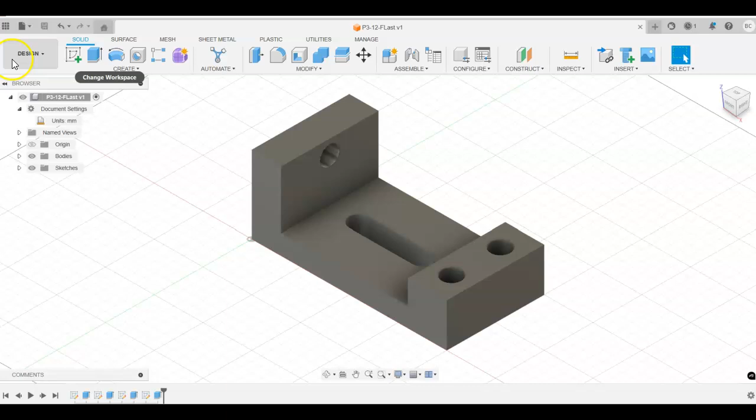All right, so we now have completed the model of P3-12 and the text. So we're going to create the working drawing of this. So let's go over to design, drawing from the design. Notice because we were in and are doing this drawing in millimeters, it auto defaults and automatically comes up as the ISO standard and a sheet size of A3.

This is corresponding to the International Standards Organization as opposed to the American Society of Mechanical Engineers. So we're going to go to the ASME standard. We want to be working in the ASME standard, and this has given us a sheet size of B. So kind of try to relate the size of the part to the actual size that it would be on paper. Remember, our paper size for a B drawing is 11 by 17. So is this going to fit?

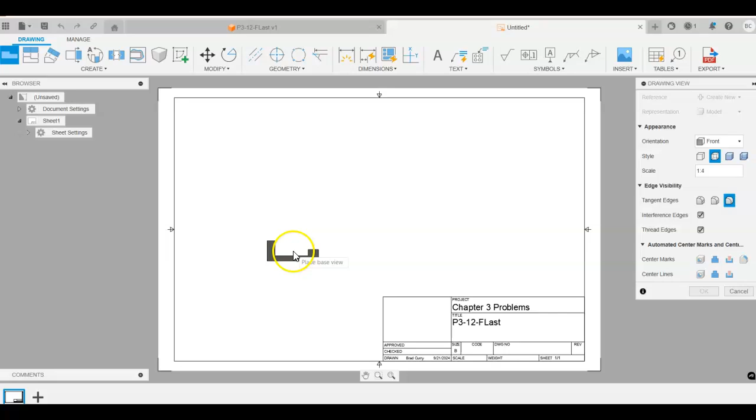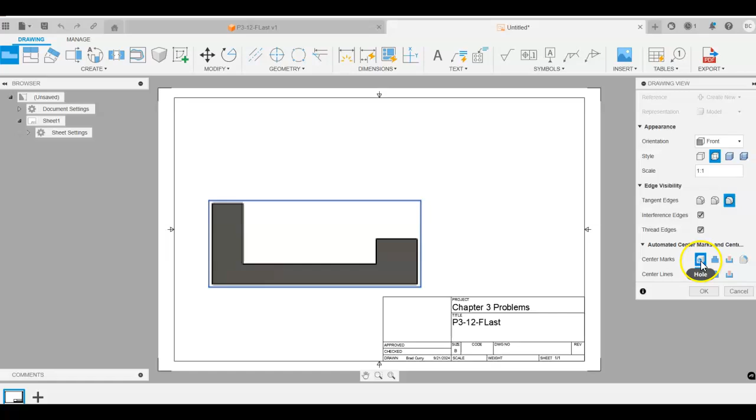So let's go ahead and click OK just so we can see what happens here. Now notice, this is bringing this in at a quarter scale. So if I wanted to at this point, we could make this 1-to-1 scale. And as you can see, at a 1-to-1 drawing, I can get this taken care of. Let's check mark and activate these center marks and holes. See if that makes any difference. Click OK.

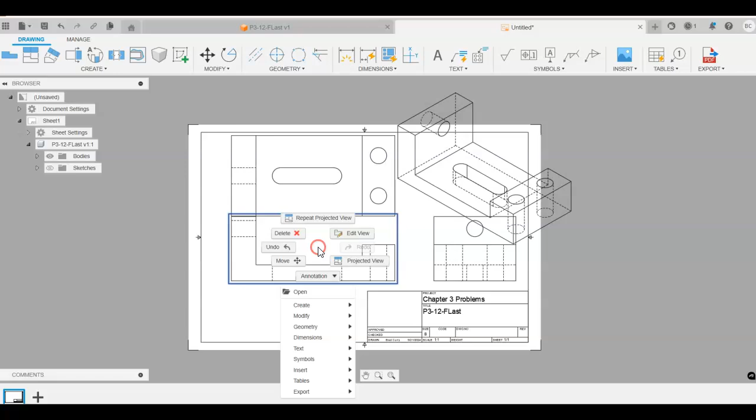Now let's do our projected view. So I'm going to project over. Now notice we still don't have enough room here for all these views. So it's still too large. So let's go back and edit this view. Let's make this a half scale instead. It changes everything there and brings that into half scale. Right up here, let's edit this view. I'm going to make this a quarter scale because I don't need it to be that big. And we'll close that out. So that gives us the size.

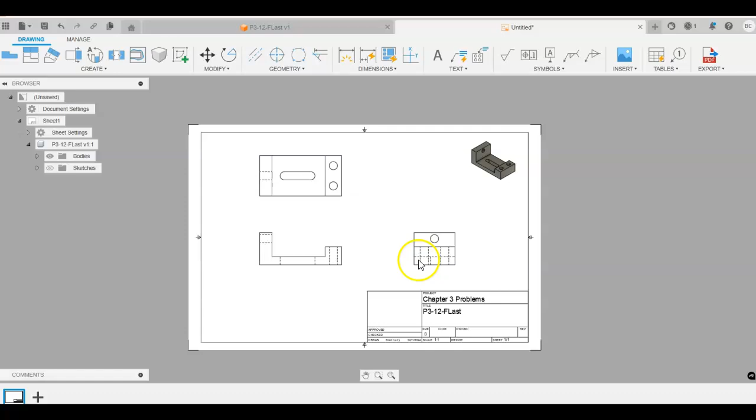Now we've got plenty of room here, and this drawing is quite large, so we'd have plenty of room for our actual dimensions and so forth. So that is one drawing style for a size B. Let's compare this now with a size A. So let me go back into the drawing from design. We're going to come to an ASME again, and we're going to make this a size A drawing. So let's click on OK.

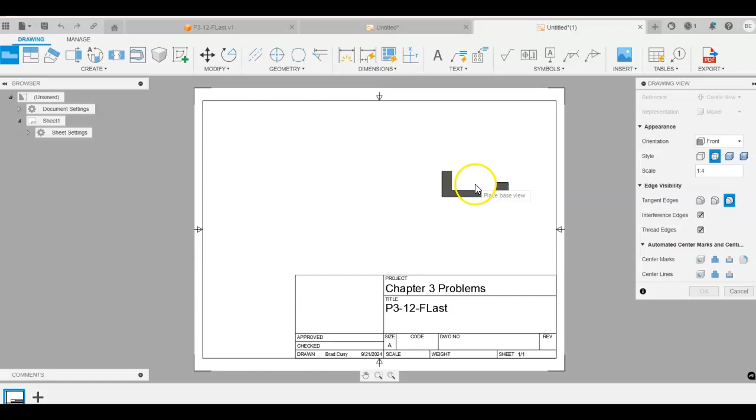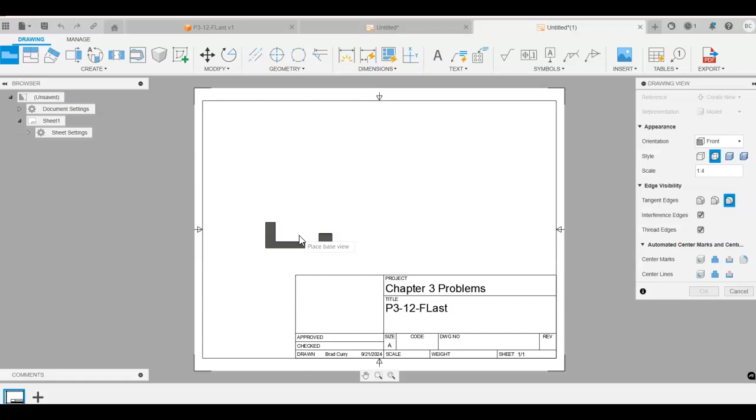So notice it's wanting to bring this in at quarter scale too. So let's accept the auto prompt here. I'm going to say quarter, place that, hit OK. Let's project our views. And there is what we're looking like. I think that's a little too small. So let's come back and make this half scale. Notice how that brings everything up. Let's edit this view so we can make this a quarter scale up here, shade that, close it in.

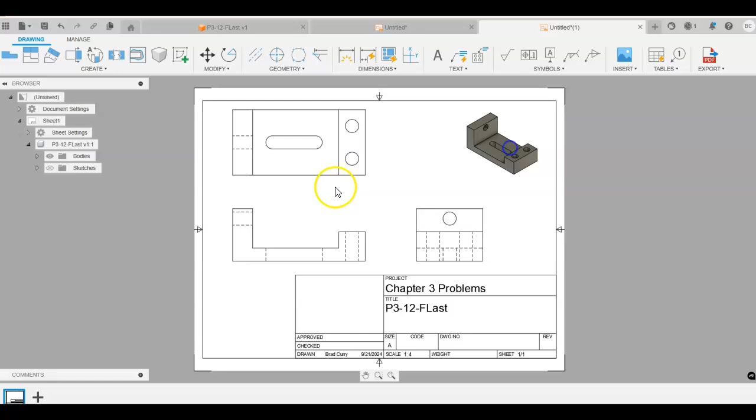All right, now this A size drawing is probably going to be big enough, and of course we can easily print this out with a regular printer to get this drawing taken care of. Now let's compare this. I still have these open. Notice it's a size A drawing down in my title block. It's also showing quarter scale here as well.

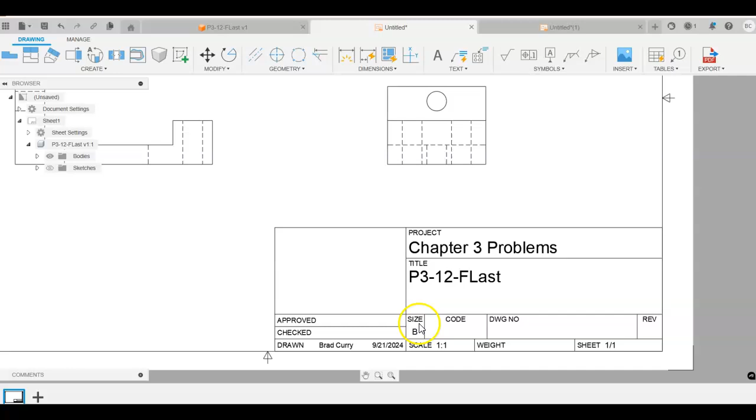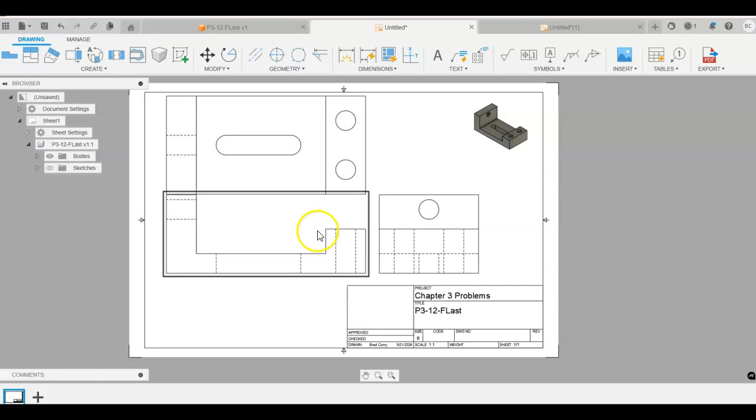Let's take a look now in the other one. Here, as I zoom in, it's a B size. The scale is 1-to-1. We brought that in originally as 1-to-1, but it's actually 1/2. So depending on how you bring this in is what's going to be put on here. So let's delete this out and try this again, and see what happens.

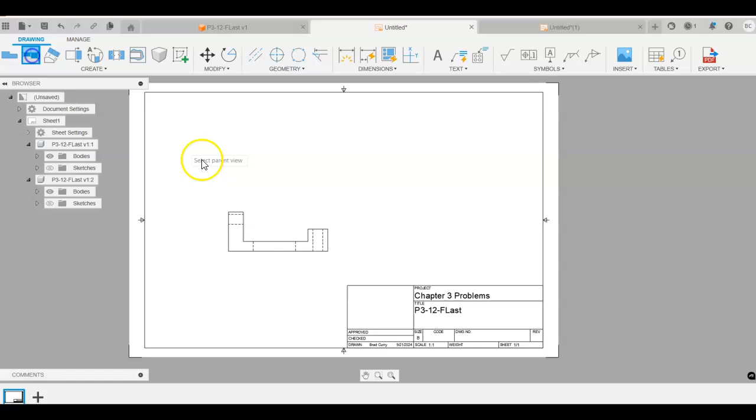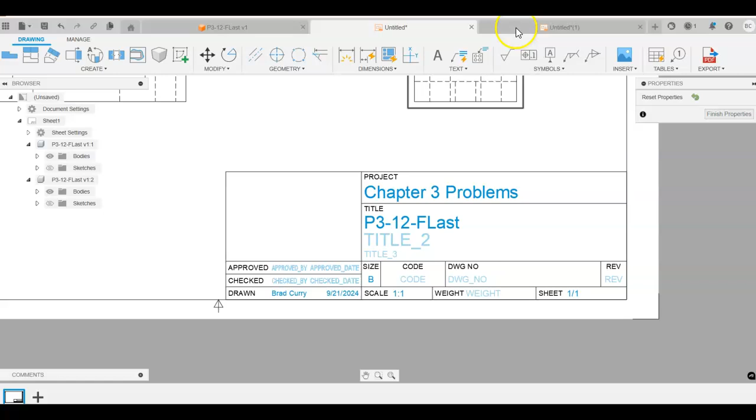If I come back in here with my base view, let's do this as a half scale. Place this in here, drop it, do my projection lines, and replace those. Notice it's still showing a scale 1:1. So we would have to do something back in the drawing to correct this. So be mindful of that, and as we're creating these working drawings, be aware of how, when you bring your drawing in, it affects the title block as well.

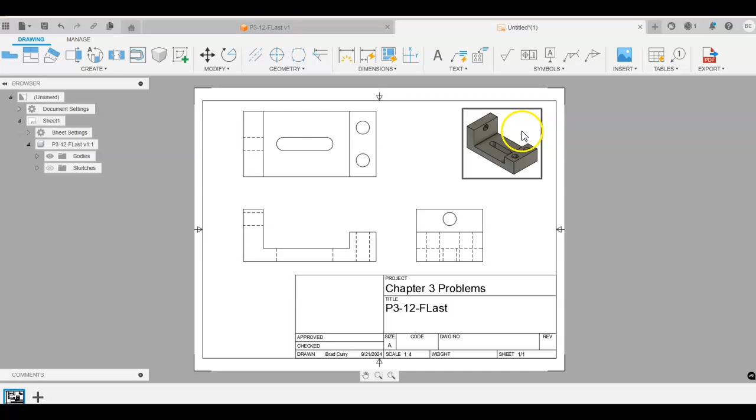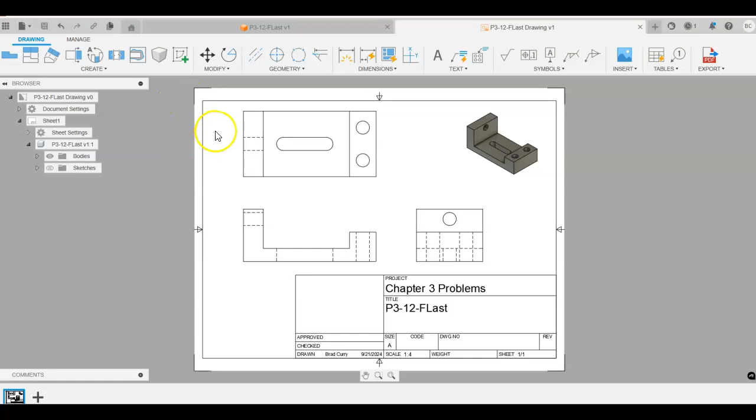So we're going to keep the size A with a quarter scale drawing here. This is the one that we want. I've got my front view, my top view, my side view, and the smaller scale isometric. So we're good to go on this one. Make sure you go up and do a save. It will automatically bring it up as our drawing file so long as we've saved the modeling file. Click save. We're good to go, and you can submit a screenshot of your drawing to me for this particular part.